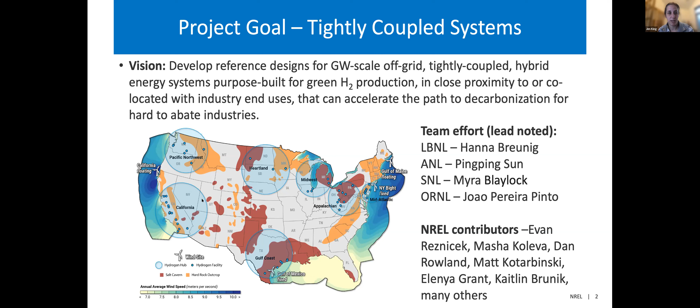So building on that, why is this important? Why does it matter if we co-locate and bring all of these technologies together? From my perspective, the time to deployment can be reduced. And how does that happen? Integrated H2, or bringing all of these technologies together and having them coupled and integrated, provides an accelerated deployment path that opens up new locations that lack grid infrastructure.

So if we need to electrify all sectors, buildings, vehicles, and industrial decarbonization, that's going to require a massive grid build out.

These types of systems that are co-located could maximize the use of existing infrastructure and open up new pathways for this to be deployed today. The co-location of assets can provide extra cost savings, whether that's through balance of station or novel integration technologies across heat or power electronics or others, and also provides for cross-sector coupling opportunities.

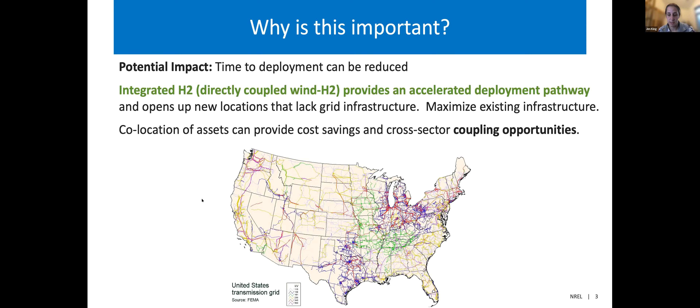Now, the use cases that we have considered when we do this modeling and analysis are these three that are pictured here. The first one is fossil fuel based, so using steam methane reform to produce hydrogen. And then we examine both steel and ammonia as an end use. I'll be focusing on steel today.

The second use case is using PEM electrolyzers, but they're connected to the grid, and then they produce hydrogen that goes into the steelmaking process. We've also considered co-located wind or solar or other renewables, but backfilled by the grid. And then the last one is an off-grid hydrogen production. The steel plant is still connected to the grid, but off-grid hydrogen production, again, so we take some of that burden off the grid.

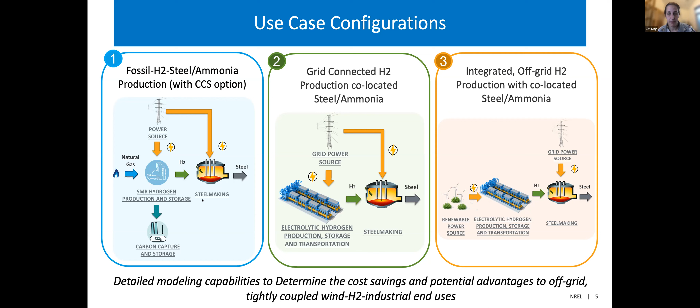Now I like to show this map because it really brings a lot of the data together that we need to rely on in order to look at these systems, and it shows the complexity of looking at the full system and how it differs based on the location that you choose.

So here we have the renewable energy potential in blue. Darker blue is better renewable potential. You have hydrogen demand centers in the orange, which is ammonia, and the black, which is relevant for this conversation, which is more the syn fuels and metals. And then you have water scarcity in the brown areas, and then you have geologic hydrogen storage potential in the salt caverns, which is the gray outlined, and then lined hard rock, which is in the black hatched areas.

And we've done a deep dive on these 5 different locations that I'll talk about. We've done Minnesota that has suitable renewables, potential for lined rock caverns and access to raw materials. Iowa has good renewables, access to existing ammonia pipeline, but no geologic storage. Indiana has pretty good renewables, largest steel mill in the US, but no geologic storage.

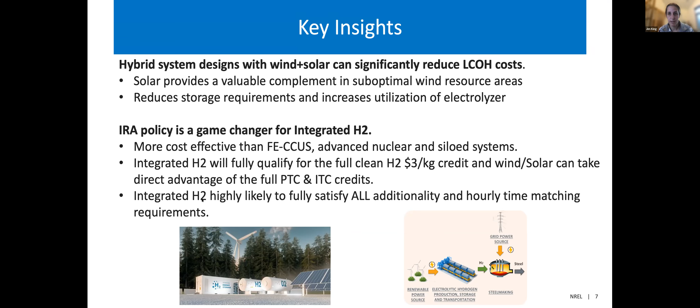A few other things to note here is that integrated H2 costs are highly site specific. It's really driven by the wind resource more than the solar resource. That has a substantial impact on LCOE and therefore LCOH. And again, these off-grid deployments enable more deployment options that don't rely necessarily on having grid access.

Cost of hydrogen storage is the big driver for LCOH, especially when policy is not enabled, and directly coupling these renewables, meaning not having the grid in between technologies, can provide significant cost savings.

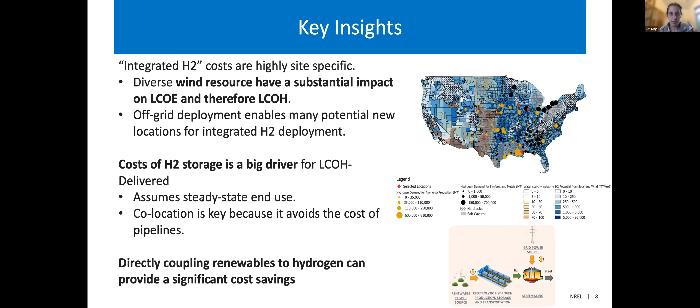So moving into the results here, I'm just going to take a deep dive into Texas in 2030 and talk through some of the results that we've been seeing, and then we'll go kind of to the broader 5 locations that we looked at. So here we have our first use case, which is the first 2 blocks, which is

fossil fuel-based approach using steam methane reform. And then another option was steam methane reform plus CCS, carbon capture sequestration. And the carbon capture sequestration is eligible for a tax credit as well, and that has been applied here. And that's shown by the gray bar pushing the cost lower. So this is the cost of hydrogen, in particular, I didn't mention that up front. And we're kind of using steam methane reform as the baseline to understand how all of these other types of scenarios compare.

There are several assumptions that went into this analysis, which I'll talk about on the next slide after we go through these.

But the next use case is on the grid, so we have a grid-only case, grid connected to a PEM electrolyzer feeding into a steel making facility. And then we have wind plus grid, where you have a wind plant co-located with your hydrogen backfilled by the grid, and then grid plus wind plus PV.

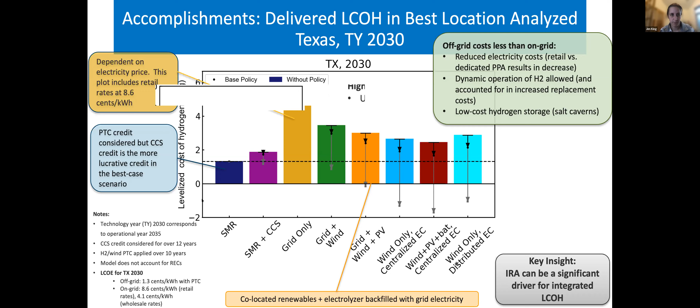Okay, now bringing all of the locations together. I've mentioned some of these high-level assumptions, but I want to be clear here before moving forward that these results are preliminary. We use publicly available data for cost of raw materials, cost of transportation, wind resource using the wind toolkit data, solar resource using the NSRDB, and so on and so forth.

These types of analyses can be further refined with local knowledge and local data. We use the annual technology baseline from the Department of Energy where applicable. Electrolyzer costs are based on HFTO from DOE's projections.

Electricity prices are difficult to forecast and are based on a decarbonized grid and are retail prices. Current supply chain limitations are not represented—so if it takes longer to get electrolyzers and things like that, we don't account for that in replacement costs.

We are considering specifically new builds of DRI plus EAF, and the costs are adjusted for specific cases. As I showed in the previous plot, these are the different scenarios we looked at: fossil-based on the left-hand side, grid only in the middle, and off-grid on the right-hand side.

You can see for 2025, or very near term, that SMR is able to provide the lowest cost steel prices across all of the locations.

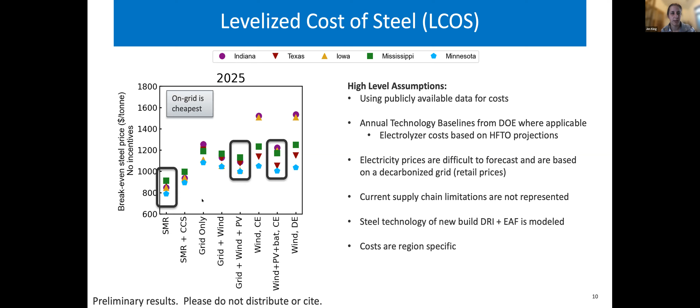We won't go through all of the scenarios for all of the plots—I just want to keep an eye on a few of them. Here's an on-grid use case with wind and solar, and then we have an off-grid use case. We'll be comparing these three across as we move forward in time and as we apply policy. So on-grid here is cheapest of the two.

Then we start moving into 2030, and costs for specific renewable technology and hydrogen PEM electrolyzers go down, so off-grid starts to become cheaper. But again, these are based off of projected retail prices and could be adjusted in the future.

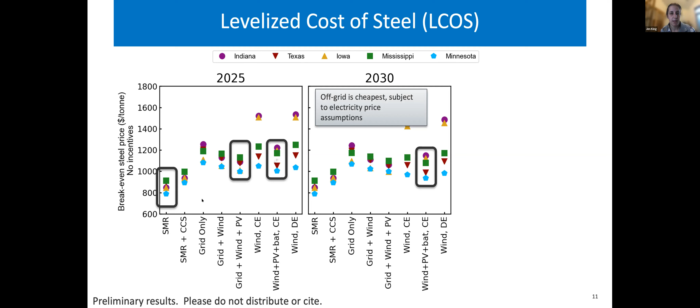And then similar for 2035 - now this is with the actual policy implemented as well. So base policy is what we just saw, or sorry, no policy is what we just saw. Maximum policy is what we see on the bottom. You can see that even starting in 2025, some of these green steel cases, with PEM electrolyzers, start to become cost effective, shown by the dotted line across. So you start to see a few scenarios that become cost competitive, and even the grid cases could become cost competitive depending on retail prices. In 2030, you're really starting to drive down that cost further.

One other thing I'd like to note is that these policies provide a window of opportunity, and without the policies, the cost goes back up. You can see that with current cost projections, in 2035 fossil-based approaches like steam methane reforming become cost effective again. So IRA makes this possible in the near term, and there's a window of opportunity here.

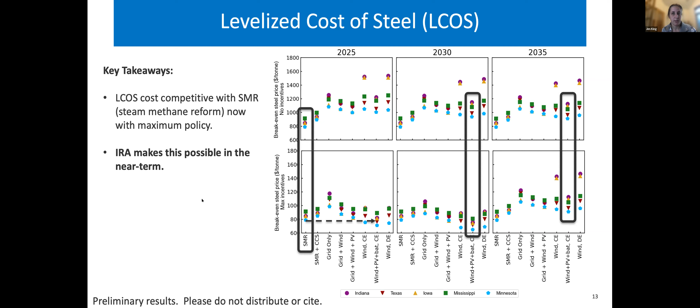Now, these end-to-end capabilities for green steel that we have developed allow us to take a nationwide view as well. Using high performance computing, these models, when stacked together, become computationally expensive, but this was looking at 50,000 locations across the US, specifically at hydrogen production.

We can figure out where low cost hydrogen can be deployed to support some of these end uses. Here we're showing all the locations where it's sub $1 with maximum policy. Another metric we can look at is hydrogen production in some of these areas - lowest cost doesn't necessarily mean the most hydrogen produced. It depends on the operating hours and so on. The last thing I'll note is each of these individual locations is optimized for wind, solar, battery, and electrolyzer ratio sizing, which is why hydrogen production changes across the nation.

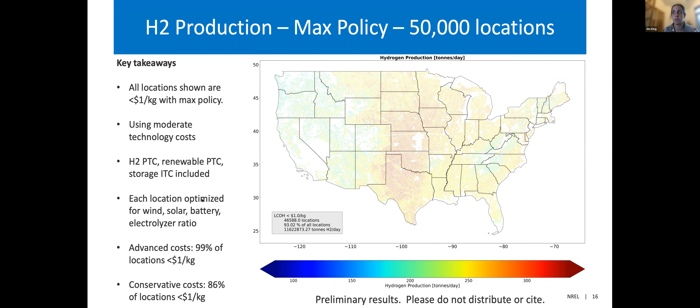Some of the other things we have looked at for these types of end uses that require steady state operation for hydrogen production or hydrogen delivered is storage. I want to tee this up with Hannah's talk next - hydrogen storage really matters, and it matters where you are in terms of how much storage you need. Depending on where you are in the US, this is driven by capacity factor, complementarity of resources, and so on, about how much storage is needed to provide a steady state. This is a conservative view because we don't assume outages and things like that.

I think the important takeaway is that there is a range here, 8 to 20 days of storage that's needed for some of these steady state end uses like steel, green steel in particular.

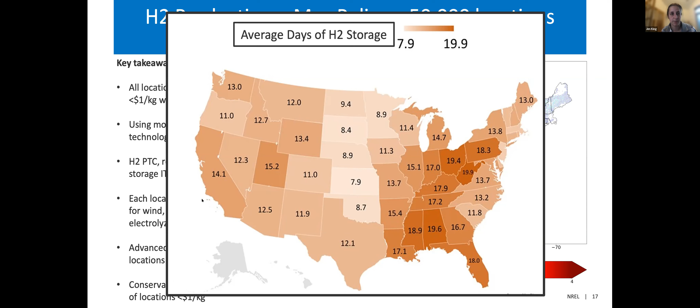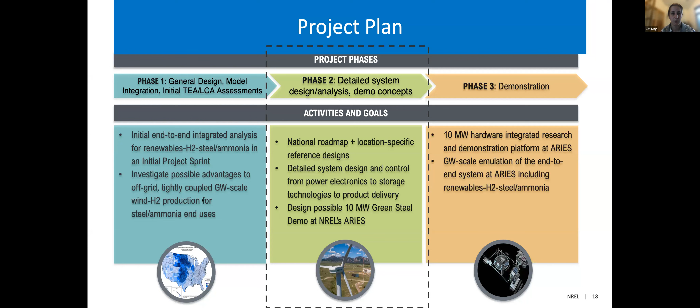I just want to provide an overview of where we're headed. So I talked about our detailed system design and analysis work so far, and our work towards the national roadmap with location-specific reference designs. We are in the middle of this phase right now, and we will be moving into demonstration and validation in the future to demonstrate some of these integrated concepts.

The last thing I want to note here is from this research, we have developed some pretty key future research questions, at least from my perspective. The first one is having an integrated modeling and demonstration platform so we can look at some of these concepts, de-risk and accelerate deployment. Low cost storage - we're currently limited to access to geologic storage due to cost.

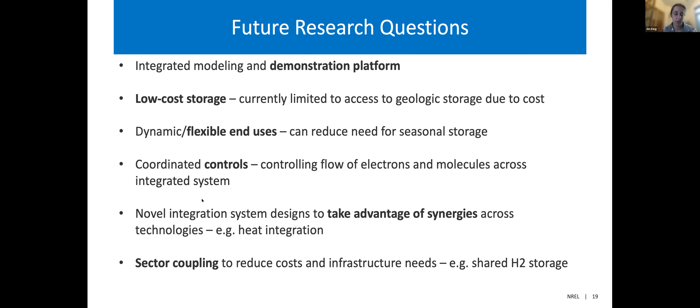Dynamic and flexible end uses could also be a game changer and reduce the need for seasonal storage. Coordinated controls across all the technologies, controlling the flow of electrons and molecules across the integrated system, will be really important. Novel integration and system designs to take advantage of synergies across technologies, things like heat integration, will be critical to drive down costs, and sector coupling - maybe pairing together things like steel or cement and concrete could be helpful to reduce costs and infrastructure needs. It could have shared hydrogen storage, for example.

So with that, I'd like to conclude my section of the talk by giving a summary of where we've been so far. The hybrid system designs with wind and solar can significantly reduce LCOH. IRA is a game changer for this integrated H2 concept. They're very site specific, but can allow for off-grid deployment, and the cost for hydrogen storage is a big driver for LCOH. Didn't mention it a ton during the presentation, but there was a huge spread between projects that would be built where there's salt caverns versus where there's no storage.

And then finally, directly coupling renewables to hydrogen, meaning not having the grid in the middle, provides significant cost savings. So that, I'd like to thank you for your time, and I'll pass it back over to you all, Thomas and Rebecca.

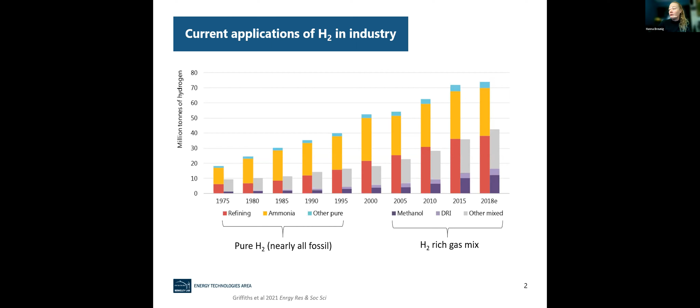So we want to deliver the renewables of wind and solar, as Jen presented. We want to be able to have reliable delivery of that energy. So it's not only about smoothing daily and seasonal variations, it's also about backup reliability of feedstock and being able to meet the demand of that end user.

And so this required us to do a bit of a campaign to understand the needs of iron and steel facilities for hydrogen demand, and understand the flexibility they have in that feedstock, the purity they have in that feedstock, the rate of delivery, the pressure and temperature. All these things affect ultimately the delivery of that hydrogen.

And in cases where we're not just having a pipeline go directly to the iron facility, there might be co-location of production. There are questions around whether that hydrogen is coming straight from the electrolyzers, from a pipeline, or from hydrogen storage. So these things all affect the ways that hydrogen is being coupled into the system, and there are a lot of questions to be answered about what does that do to cost and technical viability.

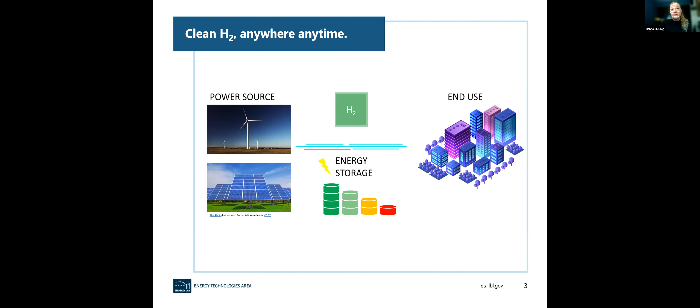So why is it a big deal to talk about hydrogen storage these days? Well, hydrogen is tricky. It's a tricky thing to move and it's a tricky thing to store. It has very low volumetric energy density at ambient temperatures.

And so often you hear about hydrogen being cryogenically stored to increase its density, or compressed to very high pressures, such as 350 or 700 bar systems. But even then, these systems are challenged by the amount of energy it takes to offer that level of density. And even those levels of density are not necessarily good enough for the end user.

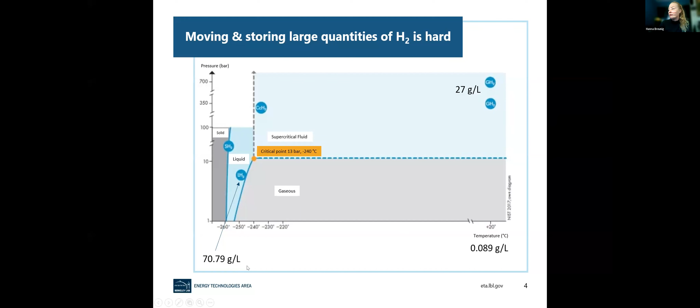So there's been a lot of advancements to develop many, many different types of hydrogen storage systems. And I often think of this parallel to the battery world, where there's many, many different batteries that have evolved to meet the needs of the end user.

We're now in this really novel time period where we are understanding the needs of the end user and co-designing the storage system to be able to meet these needs.

I talked a little bit about physical-based hydrogen storage: cryogenic liquid, compressed gas, and combinations. There's also materials being developed that can store hydrogen in very high densities, often at near ambient conditions, which is compelling for safety and cost reasons. Some of the most common are adsorbent materials, which often require some cooling to get the hydrogen stored onto them. You can think of them as a crystalline structure packed into a tank. Hydrogen is flowed in, it adsorbs, and it's stored there until released for end use.

There's also liquid organic hydrogen carrier systems. You can think of these more like reactions with a catalyst-driven reaction—almost like a little factory where you take hydrogen, convert it into something else, and store it pretty much at ambient conditions until you need to react it back to hydrogen. There are other materials too, and today I'll be talking about a couple different types of hydrogen storage at scale, including organic carriers.

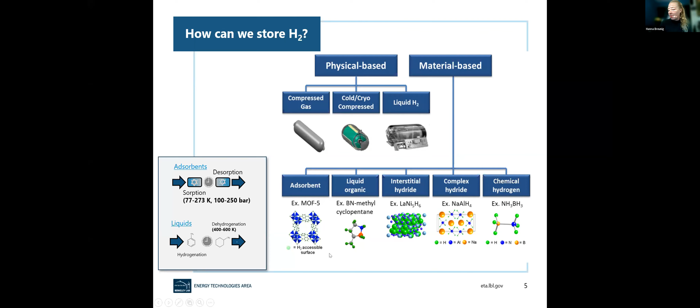As I mentioned, we're in an interesting period where we're learning so much about the needs of hydrogen storage. Like Jen provided, we now understand what number of days of storage we need for different locations in the United States, and what that means for the size of the system. On the end user side, we also understand the rate of delivery needed, the reliability needed, the purity needed. All of these things trickle down from the market.

What my team does is translate those needs into material targets and properties for the engineering system. This is what the HyMARC Department of Energy Consortium does—we validate materials, develop materials, and screen materials for promise.

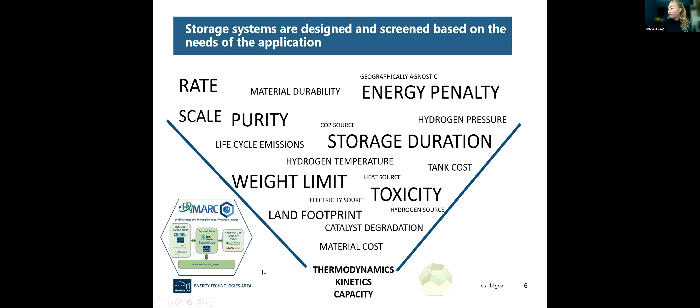Some very recent work from the team, published in 2023 in Energy & Environmental Science, was a whole facility analysis of an iron and steel facility based on DRI, or direct reduction of iron system. These have been demonstrated with syngas and methane, but they're just now starting to be demonstrated with pure hydrogen. We're still learning a lot about the system, but we were able to do enough engineering analysis to understand the needs, technical targets, and delivery rates, with the ultimate goal of producing a green steel product at market price with significantly lower greenhouse gas emissions than today's systems, or even natural gas with CO2 capture, as Jen noted was a benchmark system.

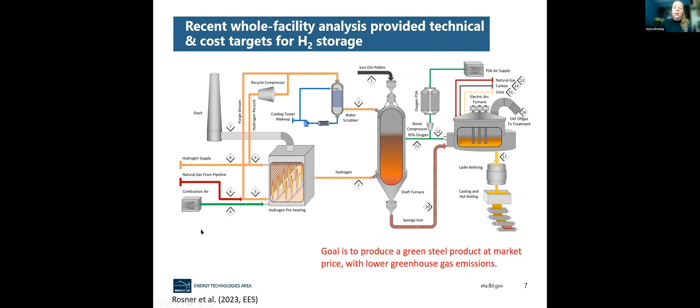In our starting work, this was a lab call funded by the Department of Energy. We were tasked with doing a full design and evaluation of a liquid organic hydrogen carrier system. We'd had models working with Argonne National Lab to look at salt caverns, rock-lined caverns, cryogenic liquid storage, and compressed gas storage, but we hadn't fully modeled what the costs and performance of a liquid carrier would be. So that's what we did.

We chose an example location where we knew the wind and solar profile, to help us build the mathematical model. Ultimately, we got to a point where we're now able to take those 50,000 data points that Jen noted and start to rapidly screen them to model the systems through scaling factors that I'll discuss in the coming slides.

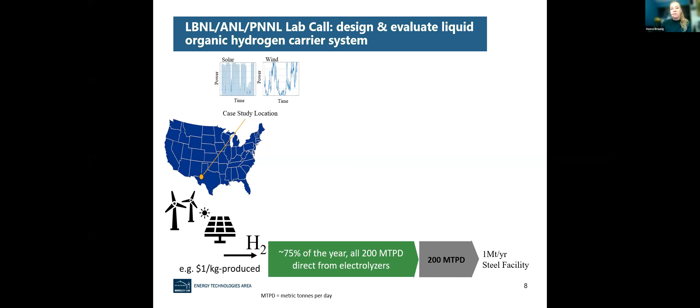We took a location, estimated the production of hydrogen assuming a target cost rate, and modeled the amount of time the electrolyzers could deliver that hydrogen to the end user. For a medium-sized iron and steel facility, we ballparked around 200 metric tons per day of hydrogen would be consumed and had to be delivered reliably. The reality is electrolyzers cannot always meet that demand—it would be too costly to oversize them—and there are times in the year when there's not enough solar or wind to deliver that amount.

The solution was to develop a hydrogen storage system that, during periods of excess renewables, stored enough hydrogen so that during periods of limited renewables, we were able to deliver that hydrogen at least 200 metric tons per day to the steel facility. That's the example system we have. We're about 25% of the year actually delivering that hydrogen from the storage facility. So we were tasked with that extreme case where the storage facility had to deliver all hydrogen during some cases.

Now that's an assumption, because there are many cases where the electrolyzers will always run at some level. So those are variables that we're playing with now.

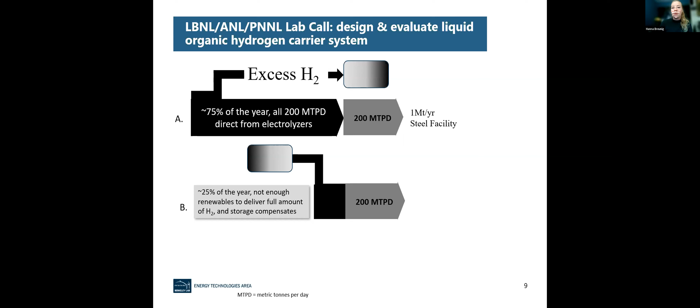What we found is, again assuming you hit the $1 target that the DOE has as a goal for hydrogen production, what is the added cost of storing your hydrogen? We found if you look at the amount of hydrogen flowing directly, that's delivering $1. If you look at the amount going through the storage facility, and that storage facility has an added levelized cost of about $1.25 in this case, your annualized amount that you actually have to pay over the year is about $1.31. So in effect, the storage system added about 31 cents to your cost.

So that was our starting point. We compared that liquid organic carrier, the toluene, in gray, with the other systems. We found the geologic systems were by far the cheapest, but the liquid carrier was surprisingly one of the winners, and it looked substantially better than cryogenic systems or compressed gas storage.

This inspired us to go further, to look into details of the storage system, to look into the engineering system, and understand where we could cut costs further, or also look at some of the vulnerabilities in our assumptions.

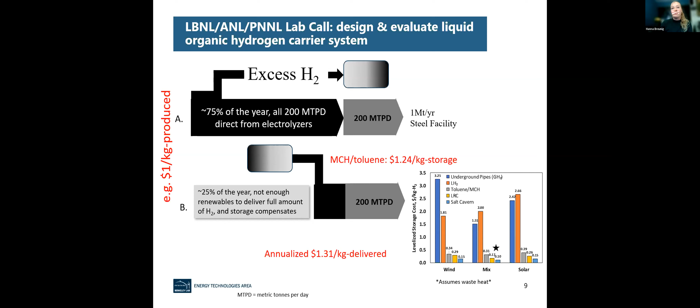So this is kind of the breakdown of how the system was modeled. In this scenario, the wind was varied with solar, so it was either a pure wind system, 100% wind, or 100% solar, or some combination. We found in this example, at a 31% wind fraction, we were able to achieve the lowest cost.

So we assumed that the storage system had to deliver 200 tons per day. We looked at the necessary wind and solar sizing to be able to deliver the amount of hydrogen we needed. We looked at the capacity, and we looked at the peak amount of hydrogen that is produced from those systems. Now, some of that is going to storage and some is going directly to the facility. Ultimately, that helped us size our storage system.

And you can see the way I'm going to talk about the liquid carrier is you have decoupled systems. You have that reaction to take your hydrogen, turn it into methyl cyclohexane, and you have the reaction to take that methyl cyclohexane, which is stored, and turn it back into hydrogen.

So delivering the hydrogen is what we call dehydrogenation, and that is always going to have to be at 200 tons per day, the end user's need. But the hydrogenation plant has to be able to store the hydrogen year-round at the peak amount from the wind and solar. That's why it's bigger, at least on the capacity side.

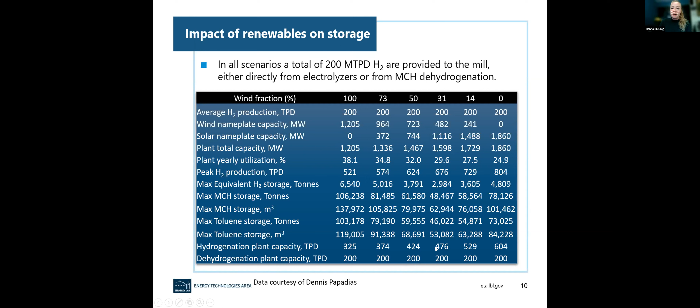So how does this compare with the needs of the steel plant? Well, when we modeled the steel plant looking at the use of hydrogen just to deliver heat demand, we ultimately were competing with natural gas. That's what currently we're assuming is providing heat. Well, that's really tricky. Natural gas is pretty cheap. And ultimately, your delivered cost of hydrogen is basically going to be near that $1 delivered target. So there's not much room for the cost of storage to be added on to your $1 to meet the needs. So that is a really tricky case.

However, if instead of using that precious hydrogen for heat, you're actually using it to directly reduce the iron, now you have an interesting system where you actually have more space to have a higher cost hydrogen delivered and still break even with your competing systems. So that leaves about a 70-cent per kilogram of stored opportunity for the delivery and storage of hydrogen on top of your production system. So that was really interesting because, again, that is the annualized amount, which translates to about $2.80 for the levelized cost of storage.

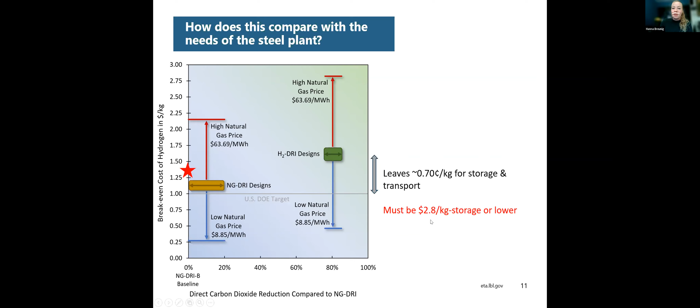A lot of this was inspired by a 2021 paper published by Argonne National Lab, as well as a system provided by Chiyoda, where Chiyoda actually has 2 locations. They're hydrogenating in one location, shipping that MCH on a vehicle like a boat, then dehydrogenating in another country or location. Here, we are co-locating those systems, so it required a remodel.

The work we're doing today is changing how heat management is being considered. We have new catalysts coming out of the HYMARC system teams that we're looking at, and we're gathering new intrinsic properties to help us further understand these systems to better improve the robustness and scale of the system.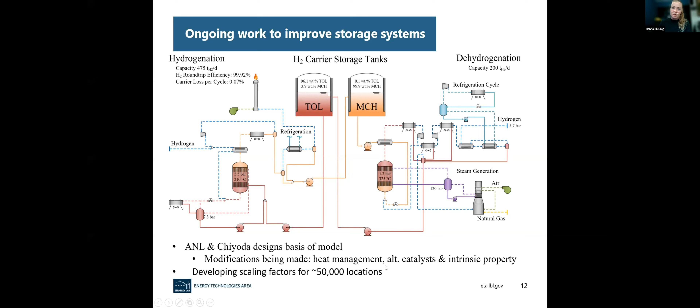We're also looking at the effect of these 50,000 locations, the needs of those locations, on the cost of this system. We've consulted with the Pacific Northwest Department of Energy Hydrogen Safety Panel to understand what it would look like - the land footprint, the regulations, and all of that for a whole system analysis.

We're also thinking about the life cycle of this system. If this system is run on electricity, it could be renewables, or it could be grid electricity, or it could be natural gas. These things all affect the carbon intensity of your hydrogen. And in today's world, where we have the IRA tax incentives driven by carbon intensity, it's very important for us to understand these impacts.

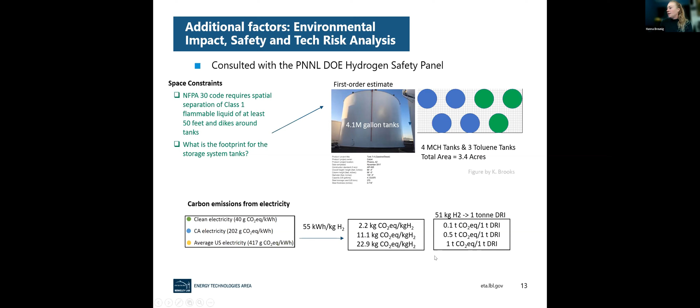So if you are using clean electricity, like renewables, you're going to be able to hit your targets, versus if you're using the average US electricity grid. These are all considerations to take into account, and that's just for the production of hydrogen.

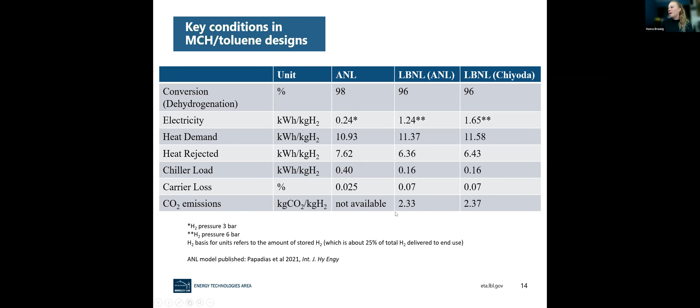Now, for the MCH toluene system, we have added electricity demand on top of your electricity demand for producing hydrogen. You also have heat demand, which will probably come from natural gas - using hydrogen is probably not going to be viable. And then you have your CO2 emissions coming from your electricity demand and your natural gas consumption.

So the breakdown of the costs - we look at this 2021, 2020 model from Argonne, we modify it with heat management, and we look at more conservative values based on Chiyoda's protection of their catalyst bed system. This all leads to delivered costs of storage.

Now, if you remember, our target was 71 cents. So again, very exciting that we are within range, as long as - and this is the big 'as long as' - we could hit a $1 hydrogen production target. And that is taking into account tax incentives that could help us reach that $1.

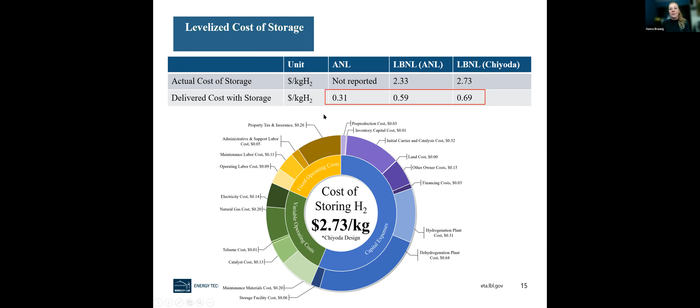So key findings: I would say the hydrogen carriers are competitive in this application. They can meet technical requirements. They're on the same order of magnitude as geologic hydrogen storage. In some locations where you do not have geologic storage, you could potentially use a hydrogen carrier system.

This is still emerging technology. We've not demonstrated carriers at this scale, so there's a lot of excitement around building up demonstrations that can improve the market's confidence in this technology solution.

We've looked at the co-location of storage at the iron and steel facility, and we would say overall, the benefit of co-location is not very clear. So if the hydrogen storage system was located closer to the renewables rather than at the iron and steel facility, there wouldn't be a big penalty on cost per se.

Key here in the cost assumptions is that the system can provide backup, reliable feedstock. So this is not just about boosting your capacity of your renewables - this is about providing, in cases where the electrolyzer is completely shut off, all 200 metric tons per day of hydrogen. If you can play with that assumption, your costs go down a lot. Those are the kind of scenarios we're going to be looking at in the coming year.

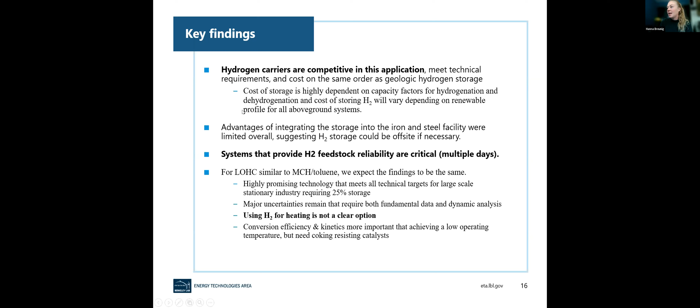Great, thank you so much, Hannah. I actually had a technical question I wanted to ask. What is the temperature requirement for the MCH system? And is there capacity for electrification there?

Yeah, that's a great question. Our colleagues Dennis Papadias and Rajesh Ahluwalia at Argonne are looking into this for different carriers, whether they could be electrified. Our team has looked into it some, and we say the state of the art in electrifying that system is very low technology readiness level. One of the challenges is being able to have very careful control over the heat seen throughout the reactor bed. Today, direct heating with natural gas and electrification cannot provide the confidence needed to ensure you don't exceed temperatures that destroy your catalyst bed, and that catalyst is very expensive. So at this time, we are conservatively assuming only steam heating systems can provide the control we need today.